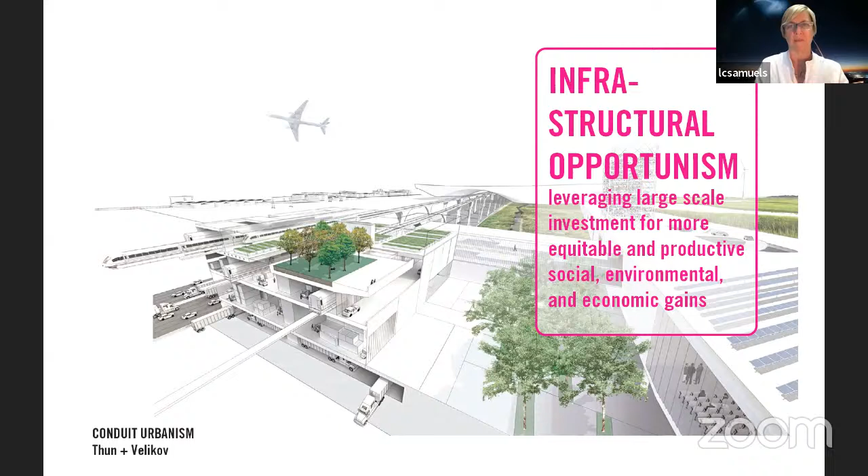One way is this concept of infrastructural opportunism: the idea that we should be leveraging the trillions of dollars going into infrastructure investment, particularly on the heels of these two federal spending bills, hopefully both approved, not just for maintenance, not for generic efficiency—though we know we're 75 years behind in terms of maintenance—but for added and equitable social and environmental benefits. This is what I call shifting from the red arrow to the green arrow.

Shifting from the red arrow to the green arrow scenario is also shifting from last generation infrastructure to next generation infrastructure. These two images are the same site—this is Cheonggyecheon in South Korea. Last generation infrastructure is resource intensive, spatially and socially disruptive, often environmentally damaging, and typically does one thing at a time, sometimes not so well.

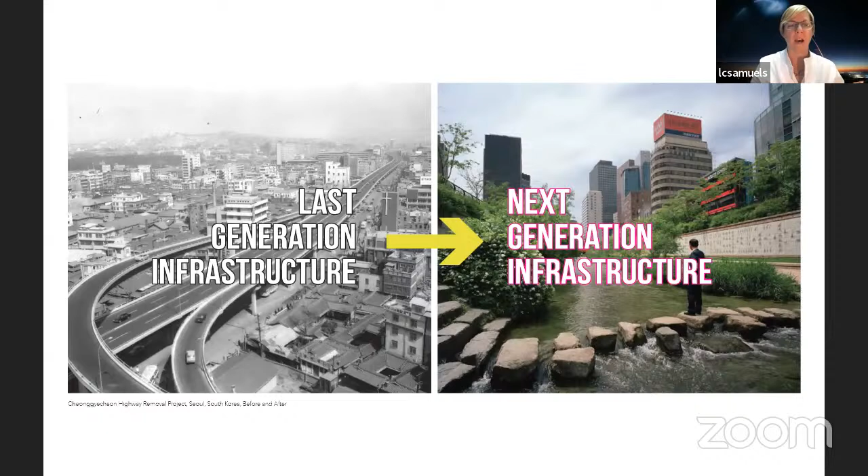Next generation infrastructure contributes to the reduction of these damages and divides, recognizes infrastructure as a public amenity, reintroduces integrated systems-based thinking into city design and planning, and utilizes interdisciplinary collaboration and design thinking to improve the quality of experience for everyone. So what do I mean by next generation infrastructure?

The concept for me emerged while I was a senior research associate at UCLA CityLAB during my time as a PhD student at UCLA. I co-planned this design competition with Dana Cuff, Roger Sherman, and Tim Higgins. The thesis statement of the competition was a call for innovative design-based solutions worthy of a national level effort to revitalize cities and put the public back in public works.

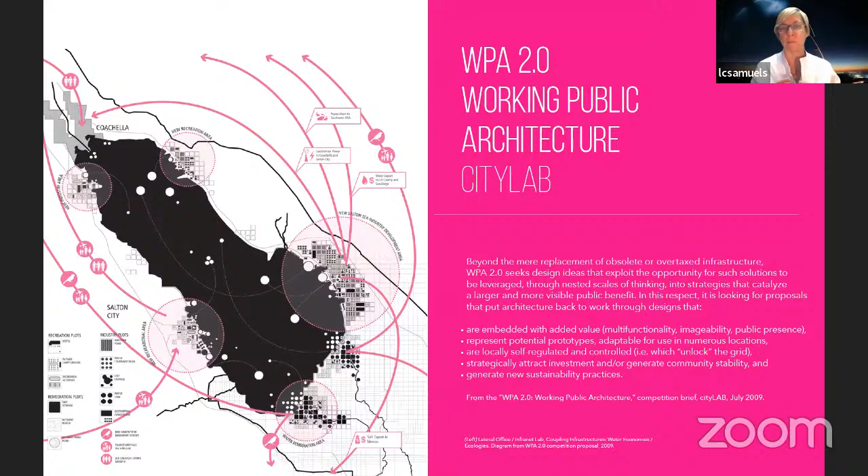This was a particular moment in time. What was happening in terms of the context that encouraged us to create this competition? I often refer to 2000 to 2010 as the disaster decade—we were seeing tragic and highly visible infrastructural collapses, most predominantly the collapse of the levees after Hurricanes Katrina and Rita in the Gulf Coast.

The American Society of Civil Engineers gave us a D average on our nationwide infrastructure. The small good news is we're now a D plus. So room for improvement, still room for improvement.

Around 2007, 2008, 2009, we were in the Great Recession, so high unemployment in the design and construction industries. What were we going to do with that excess creative energy? The American Recovery and Reinvestment Act was investing in infrastructure, but this is the first time we used this phrase: let's find shovel-worthy, not just shovel-ready projects.

We were also gaining more interest as designers and planners, particularly as designers, in environmental accountability. So movements like the Green Roof Initiative in Chicago, or the quantification of sustainability through metrics like LEED.

In addition, we were thinking more about how we might design for social accountability, an improvement on pro bono work. This was really work that was attacking problems more specifically through design. Architecture for Humanity came around in this time period, and this global competition for refugee housing saw hundreds and hundreds of architects actually focused on solving social problems through design.

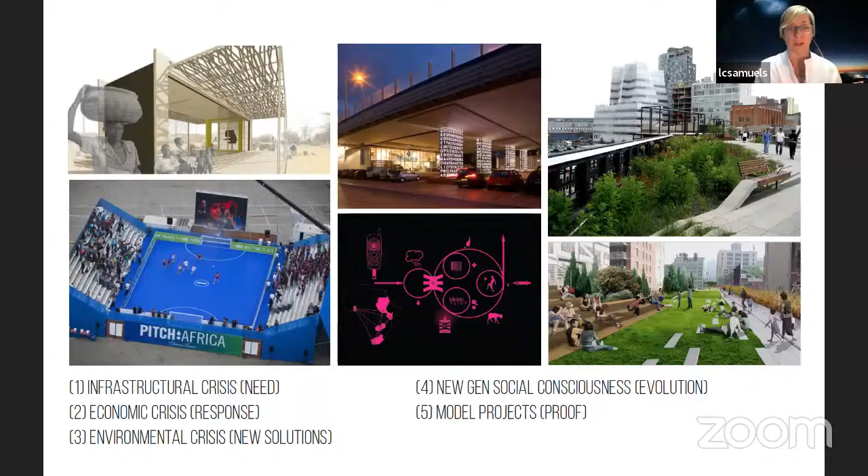So those are the first 5 things that were happening, and the 6th is really a change in the urbanism discourse. For urban design, urban planning, landscape architecture and architecture students reading history theory, the 80s and 90s was really a pessimistic moment in our design history of cities. This was the neoliberal postmodern city, a turn towards privatization of public space, what was often called the death of public space.

Our response to those problems started to change in the early 2000s, the response to privatization and the response to sprawl. They really changed in 3 schools of thought: everyday urbanism, landscape urbanism, and new urbanism, and the progeny to these movements. They spread in many, many ways, and I don't want to talk about them individually.

I really want to talk about how they influenced the change in the early 2000s, the change towards what I want to discuss, which is infrastructural urbanism. Several things were pulled from each of those movements, but primarily the everyday urbanism movement provided this moment where we started to talk about the right to the city: who deserves to participate and occupy public space. We started to talk about multi-scalar economies, multivalent publics, and personal agency.

In landscape urbanism and ecological urbanism, we started to talk about the city as a space of flexibility and adaptability, the importance of ecological performance, systems thinking, and cross-system symbiosis. And from new urbanism, we started to talk about the importance, again, of public space and placemaking.

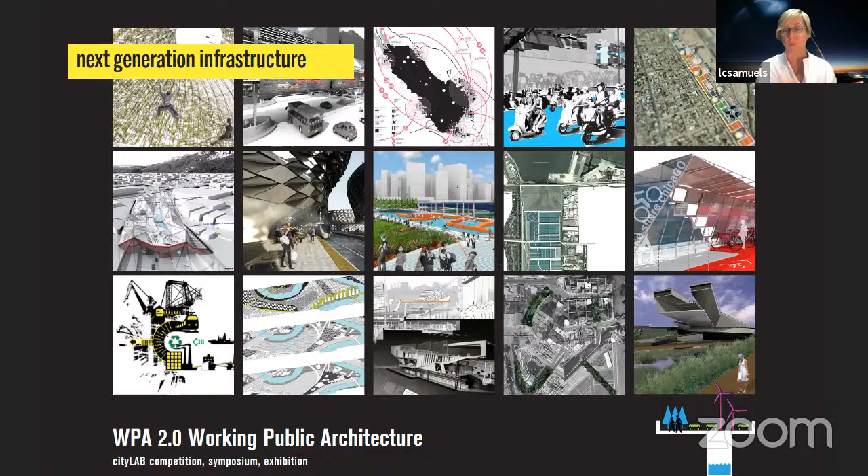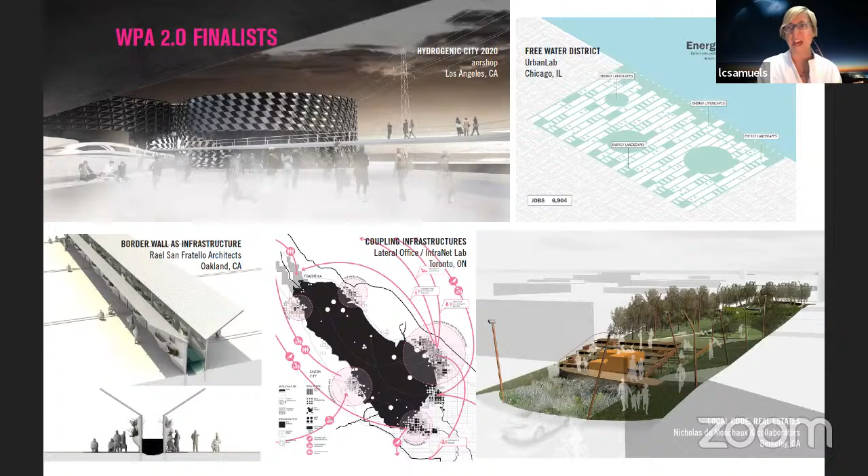So what you see here is a combination of a variety of different entries. We had 5 finalists, and these are the 5 finalists. Some of their names might be familiar to you. And we had 1 winner, the winner was a project called Carbon Tap Tunnel Algae Park by Port.

Really the importance of these projects for me was that they instigated a research trajectory around how I might define, and how all of us at City Lab actually worked on this, how we might define next generation infrastructure criteria. The first 7 came out of this competition. So briefly, I'm going to go over each of them.

Multifunctional, right? So we can no longer afford to do infrastructure that only does one thing with the space we have. We don't have the assets, we don't have the resources to do that anymore, nor should we.

Next gen infrastructure is public. So it is our new public realm where public life happens and not just where public tax dollars are spent. So it has to support inclusivity, engagements, and difference. And it has to be civic space.

Next gen infrastructure is also visible. So we can see our resource consumption and we can take accountability and responsibility for its impact on the commons.

It should be socially productive, so it increases rather than decreases equity, and it provides new amenities, new access, and new opportunities while decreasing negative impacts.

It should be locally specific, flexible, and adaptable. So it recognizes the need to change over time and to adapt to people and technology and to be specific to the communities where it is.

It is sensitive to the eco-economy, so it recognizes the interconnection of complex economic and ecological systems and how co-reliant they are on each other.

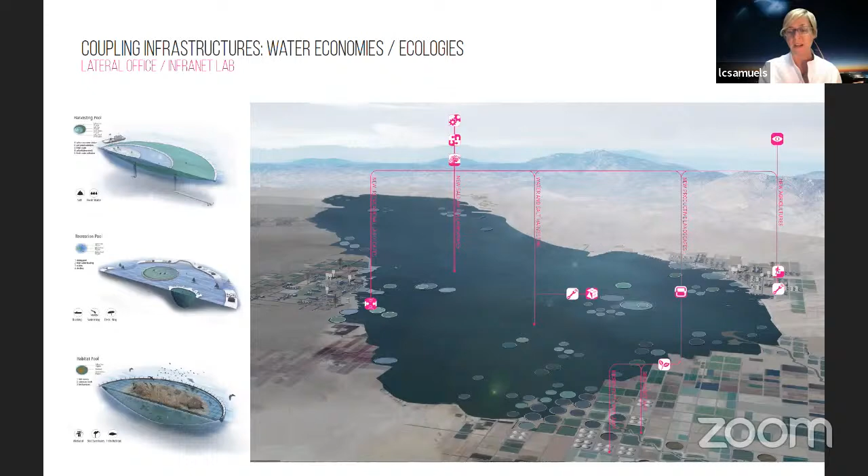So this is a project by Infranet Lab for the Salton Sea, which is a new kind of economy. Hydrogenic City is a project by aershop, which actually reinvents the water infrastructure of Los Angeles to be multifunctional and public.

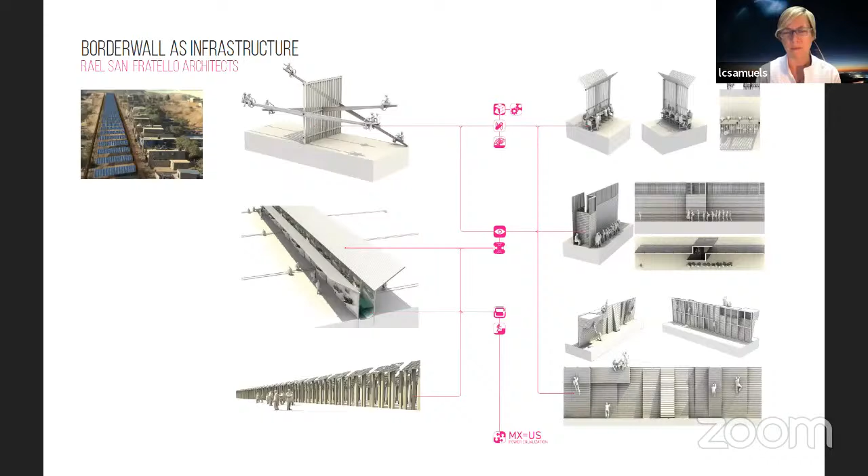And then this project, which I love, and I secretly say - though I'm sure some of you have heard this before - that this is one of my favorites, the border wall as infrastructure. And I love that it's the only project that was actually built, when Ron Rael took the teeter-totter out to the wall between the US and Mexico.

So if we have these 11 criteria that emerge from these projects, I think the question that often comes up is, how do we achieve these, right? What are the strategies that we move from having this idea to putting this idea in practice? So I say there are three ways: broadening the process, measuring what matters, and transforming the prototype so that we can shift the paradigm. So what do I mean by each of those?

Well, one of the things we're doing right now is broadening the process by working across disciplines. So even collaborating between planning and design schools, but also the bigger project that Paul and I are working on with University City Exchange and the Belmont Partners, stakeholders, experts, locals, tribal elders. As we bring people together to have this conversation, we're broadening the process.

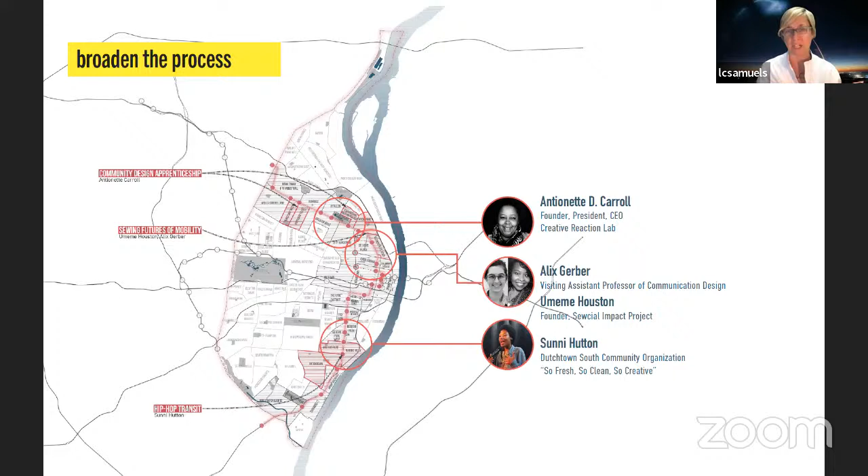We also, in St. Louis, one of the things we've been doing is incorporating local artists as a portion of our community engagement. So providing power and agency to community members is part of broadening the process. The second one is measuring what matters. And this is a tough one, right?

Rather than just saying we've got to have growth for the sake of growth, we've got to promote economic development at all costs, we have to stop thinking that good dollars and bad dollars are the same. So genuine progress indicator is one strategy that measures the difference between good dollars and bad dollars.

One of the examples they often use is a divorce, right? Well, you've got two houses, so that must be great. Or war, right? You've got to buy a lot of different kinds of things to ramp up that war machine. Those aren't necessarily good dollars when you compare them to, say, dollars for schools.

The other thing GPI accounts for is losses. So loss of animal habitat or loss of air quality. Those are costs. Or loss of social cohesivity, that is a cost. So it takes into account things that might be difficult to measure, but also qualitative as well as quantitative measures. And I sometimes call this measuring what matters.

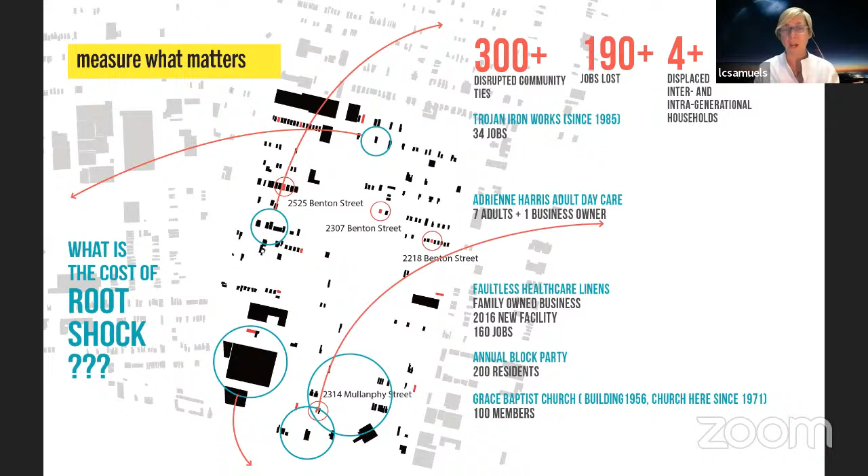So we've also been looking at a project in St. Louis where we're trying to evaluate the cost of root shock. There's a series of projects where the city is saying, oh, this was a big gain because we got tax dollars. Well, we lost a number of businesses, a number of multi-generational homes, a number of human relationships. How are we measuring that kind of cost?

And then the third one, transforming the prototype. How do we stop designing like it's 1956, 20th century infrastructure, move away from solutions that are obsolete, unsustainable, and start thinking about bigger goals than efficiencies of service?

And one way is to think about infrastructural bundling. So these are three kind of strategies: co-location, multifunctional, and symbiotic. And of course, symbiotic is the best because you can get a reduction of waste. At the same time, you're capitalizing on other kinds of resources and assets.

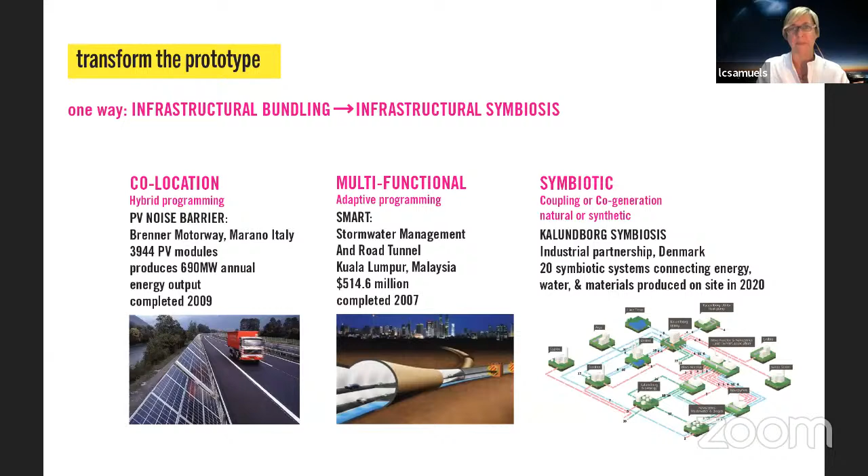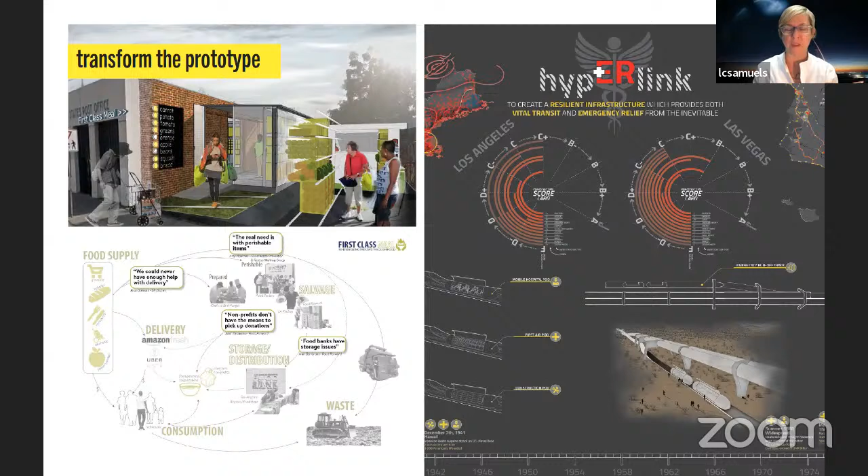The much smaller scale is the project on the left, which was called First Class Meal. It was what I call a project that takes too littles and too muches and combines them. So this was food waste combined with the US Postal Service and how we might use the excess capacity of the Postal Service to deliver excess fruits and vegetables to people who need it. So those are working at really vastly different scales.

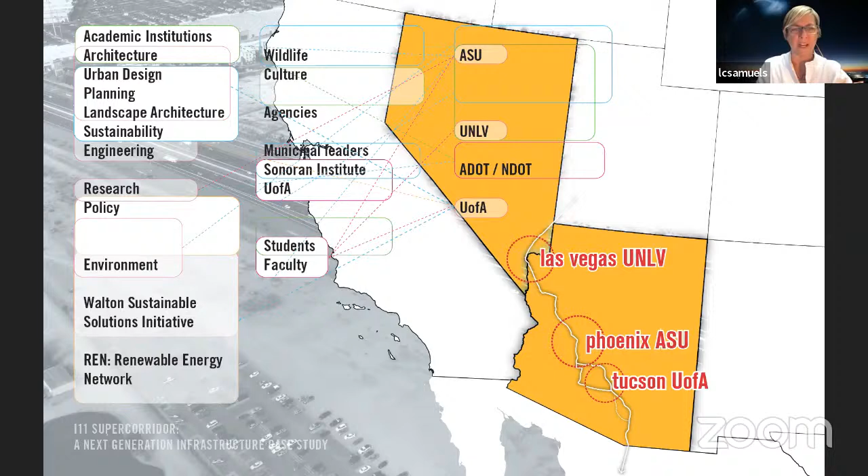The I-11 Super Corridor project is a partnership with many different universities and many different people. We at University of Arizona, the team I was working with, partnered with a team at ASU and a team at UNLV. We also worked with the Arizona Department of Transportation, the Nevada Department of Transportation, the Sonoran Institute. So we were already broadening the process. We had amazing funding from the Walton Sustainable Solutions Initiative here at ASU - shout out and thank you to them for funding that project - and the Renewable Energy Network at U of A. I think I said this is about 480 miles long.

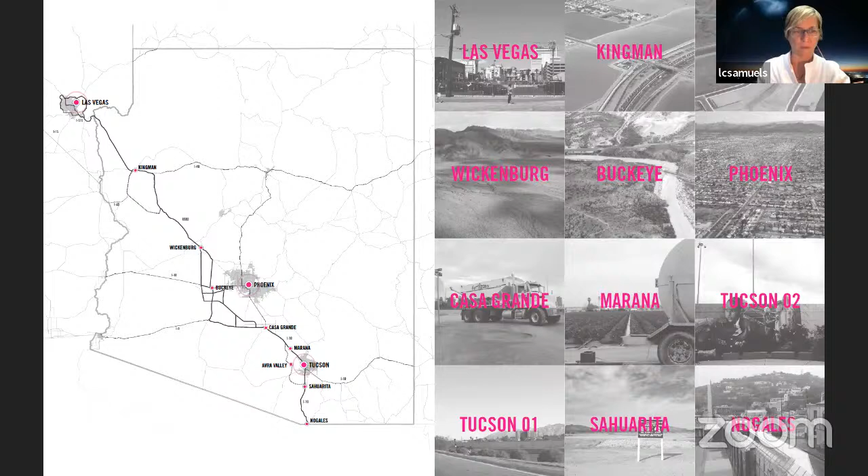Before we started, we knew that the core argument of the supporters of the road, and maybe a little bit from ADOT too, was to accommodate growth. We need to plan for massive population growth, massive traffic growth, but on the flip side, we also want to encourage growth, so the idea of I-11 is that it would also be a conduit for manufacturing and development.

So I worked with Mike Chester and our other partners at ASU and U of A on developing this first scenario, which is: if we make a couple of little changes, we can debunk this idea that you need a bigger road because we have more traffic. We said, shift a little bit of the growth pattern from a standard sprawl pattern to a smart pattern - higher density, less reliant on cars.

Reduce, and increase intra- and intercity transit. Tucson was already building a new modern streetcar - how else can we improve that intercity connectivity? ADOT had already done a study on train connectivity, light rail connectivity, really across this larger corridor. Increase electric vehicles by about 1% and move about 10% of the truck freight to rail.

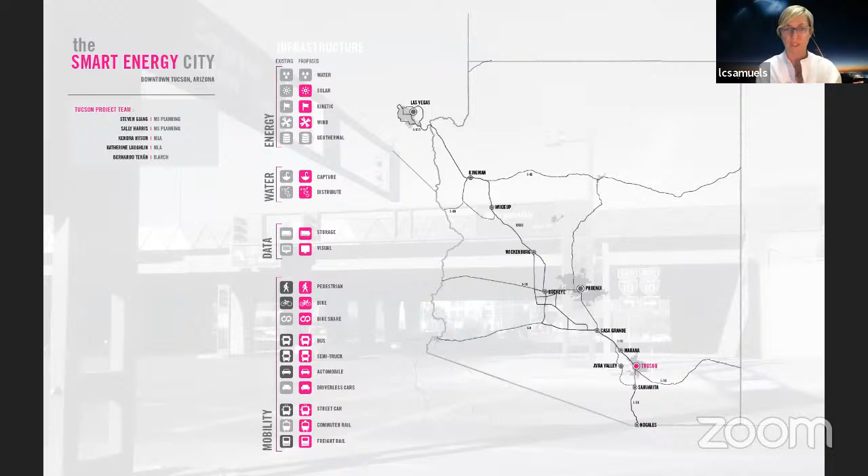So this was sort of the basis of the student projects, and I want to quickly show three student projects. These were collaborative teams - planning students, landscape architecture students, and architecture students. The idea for the Tucson project was really to focus on how this could become an energy hub.

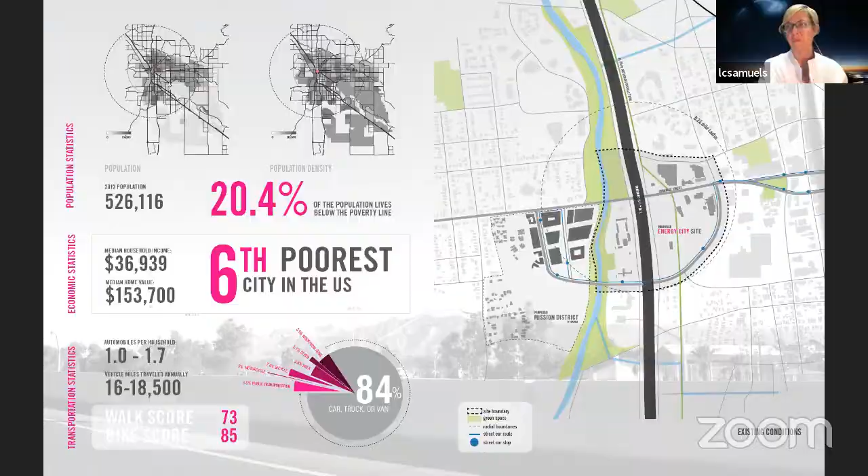The analysis of this area said there's increases happening in bike and ped use, there's increases happening in transit, and it's got a huge opportunity for solar. So the Energy City was really about creating a precedent for a sustainable, engaged, and healthy urban environment around this idea of solar energy as a driver, all kinds of renewable energy - there's solar, there's kinetic, there's wind.

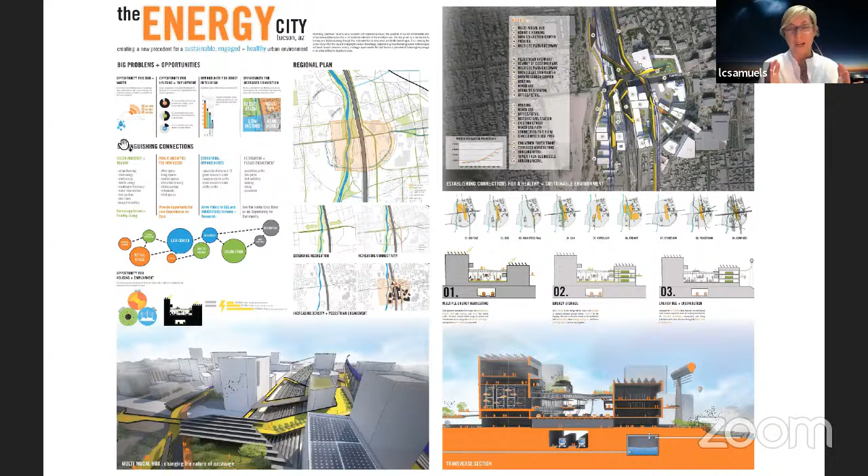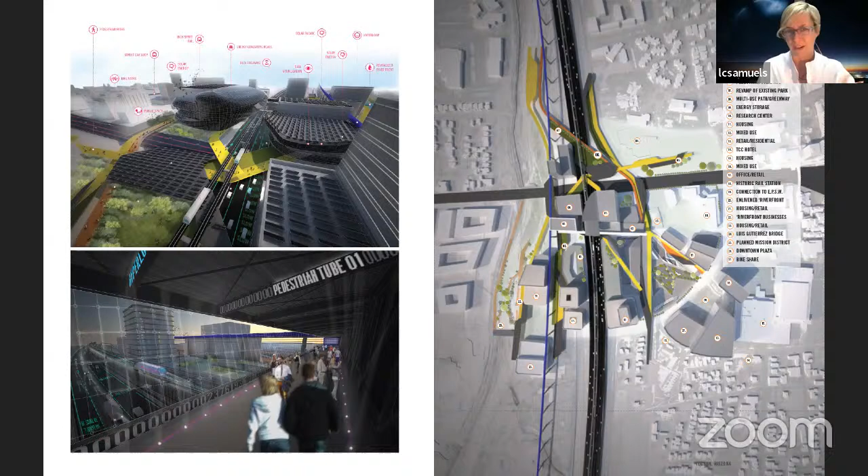The students did this in a really quick time frame - there was like a 3-week competition, and these are 2 boards from that competition. Then they had another probably 6 weeks to develop the project. So this is that hub. Most of the teams put something like a hyperloop or high-speed rail connecting all the way down the center core of the I-11, which I hope we're going to keep talking about in the next couple of days.

They used a variety of different sorts of technology, everything from solar roads to smart facades. And then at the end, we asked the students to measure what matters: how much energy are you producing, how much water are you harvesting, and where does that energy and water go?

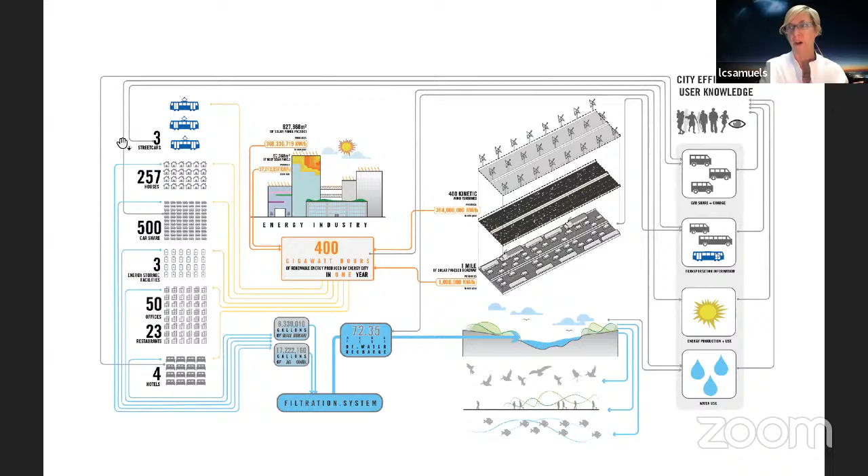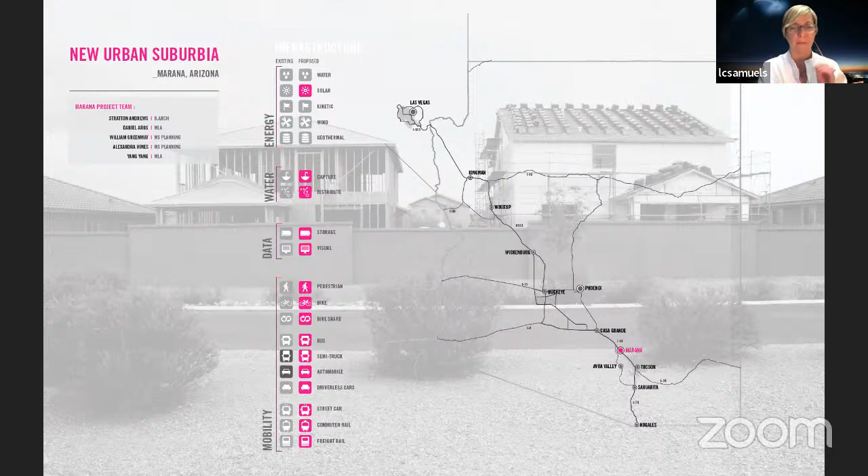Marana, same process. Marana is north of Tucson, situated between the CAP, the new future Interstate 11, and the railroad. It has a tremendous amount of water rights from a history of agriculture, so this site really looked at what that water could be used for in a very efficient and sustainable way.

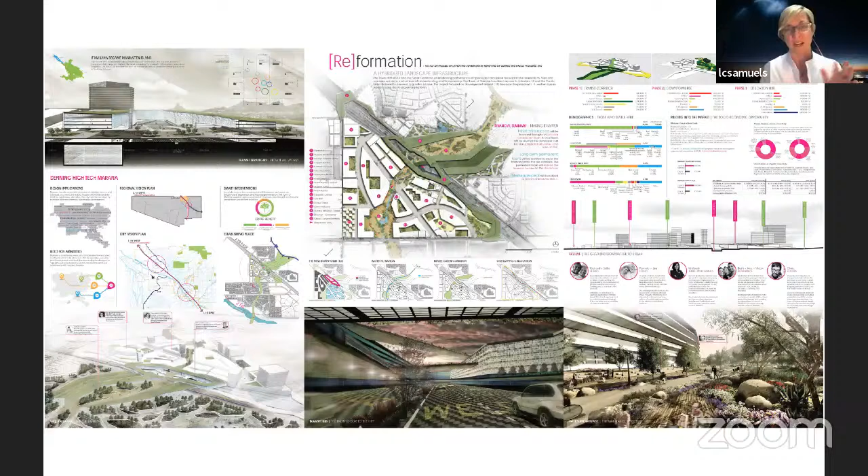So it's recycled, circulated through the land, returned to the aquifer. This node was really about education—how do you start to identify a new educational model for a place that's between Phoenix and Tucson but wants to develop its own identity? So smart buildings, vegetative facades, digital facades, water collection, and then a greenway. Many of those water rights were returned to the aquifer, but also put into creating quality of life for the people who would be living here.

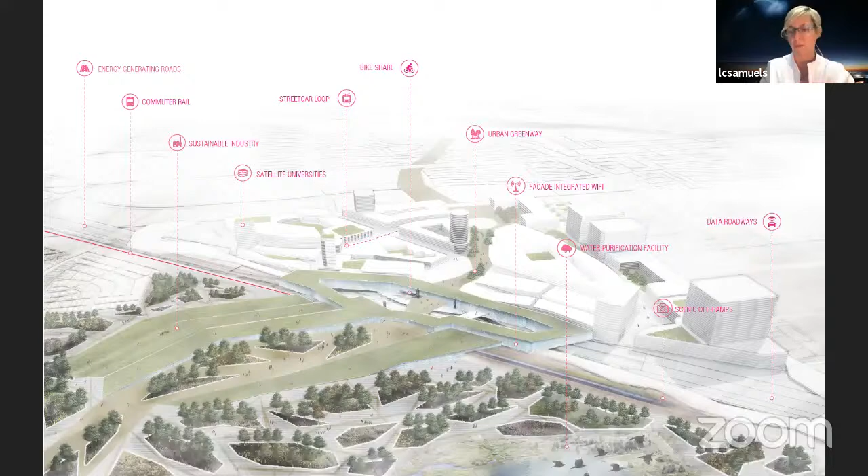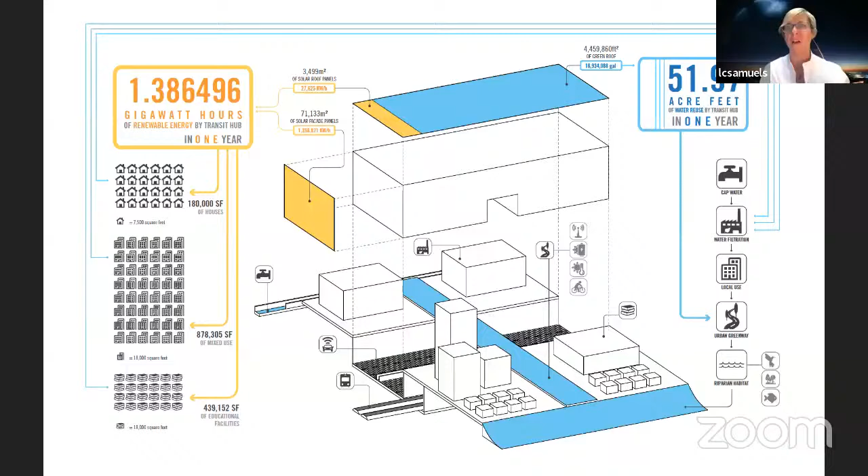And then again, a results diagram. So how much energy are we producing? How much water are we harvesting? And how much educational landscape are we creating for people who might be moving, living, and working in Marana?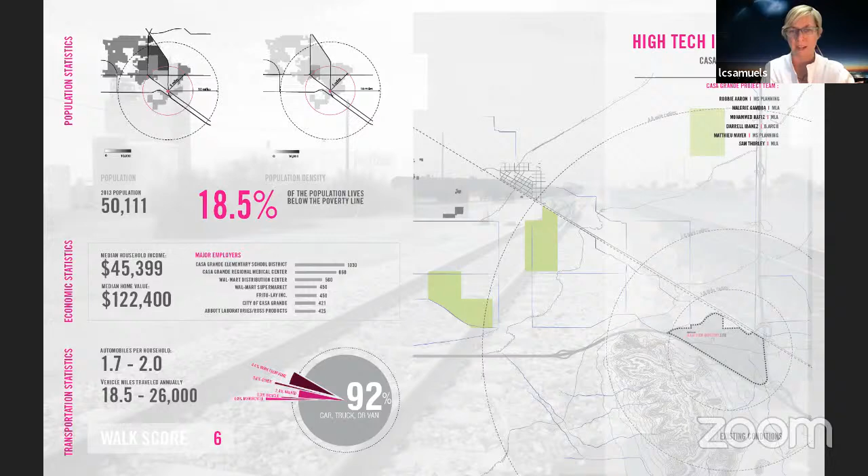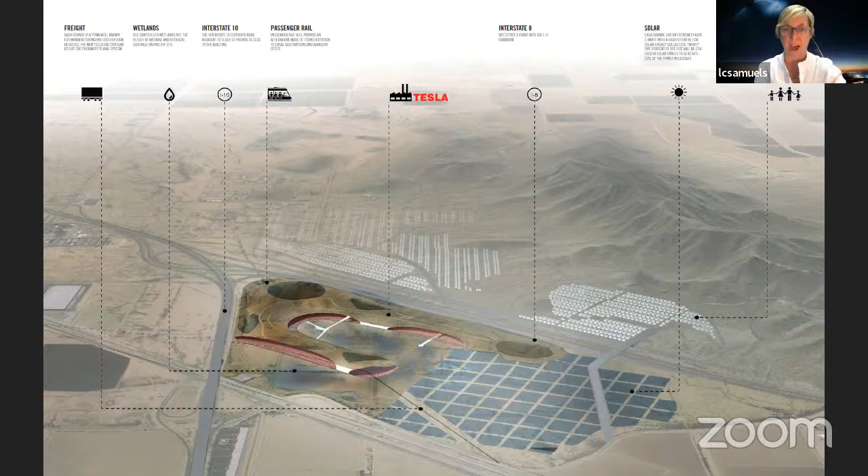Lastly, I included this because one topic of our conversation is the idea of a logistics hub. We looked at Casa Grande as a potential site for, at that time, the Gigafactory—the Tesla battery factory under consideration. The Casa Grande site along the future I-11 has two highways and a railroad. So this student team said, let's create this really large manufacturing center where goods could be produced, but we produce all of the renewable energy on site. In addition to providing renewable energy for the factory, we could also provide it for the housing for everyone who worked in this factory nearby.

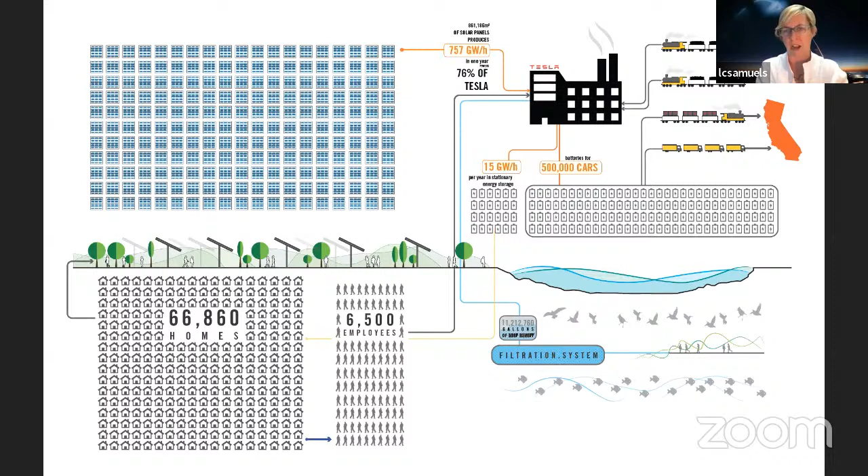All of that renewable energy went to the production of batteries. Those batteries would be put on trains, or they would support the housing. Again, energy production and water harvesting—in each of these cases that water harvesting recharges rivers, recharges the aquifer, and supports animal and plant habitat. So in addition to that 20% offset we provided by shifts in modalities and behaviors, we also had all of these other benefits to the design projects that we don't have a number for, but we can see the benefits there.

The St. Louis project is a little bit different. St. Louis is a different kind of city, with different kinds of problems, but we went through the same process. Our core team was very diverse—we had partners from Bi-State Development, which is our Metro, Citizens for Modern Transit, an advocacy organization, artists, advisors, students, GIS and mapping specialists, landscape architects, and urban designers.

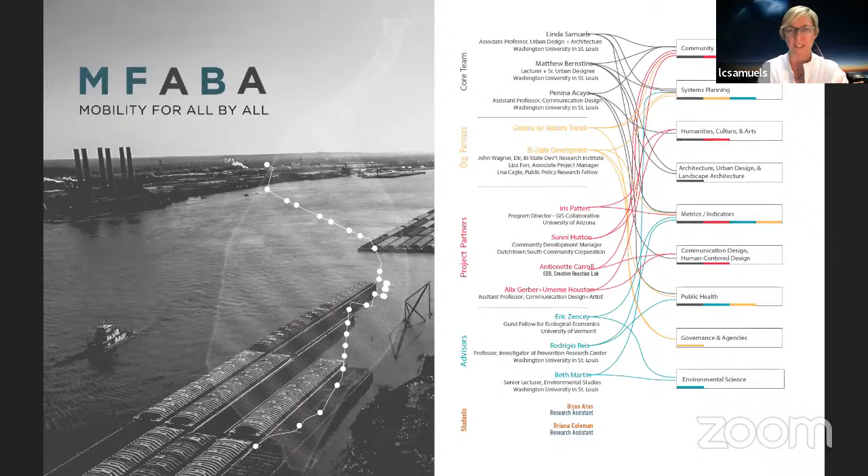To give you a little background on St. Louis—we don't like to say it's a shrinking city, it's more of a flat city in terms of growth. A lot of the population has moved from the city proper to the county. At its peak around 1950, St. Louis had 856,000 people. Now it's dropped even below that, down to around 305,000—over a 60% drop in population.

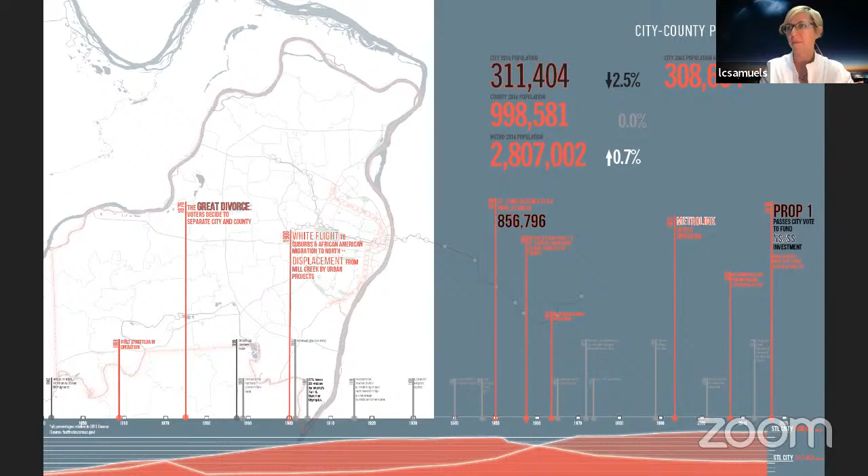A lot of that drop is happening on the north side of the city, and I'll give you a bit of data about that. We do have an east-west transit line, about 46 miles, which branches just outside the city. You can see the blue to the right is the Mississippi River, and the red line to the left is the edge of the city. St. Louis is one of the only cities in the country not in its own county—they had what's called the Great Divorce, so the county and city are often competing for resources.

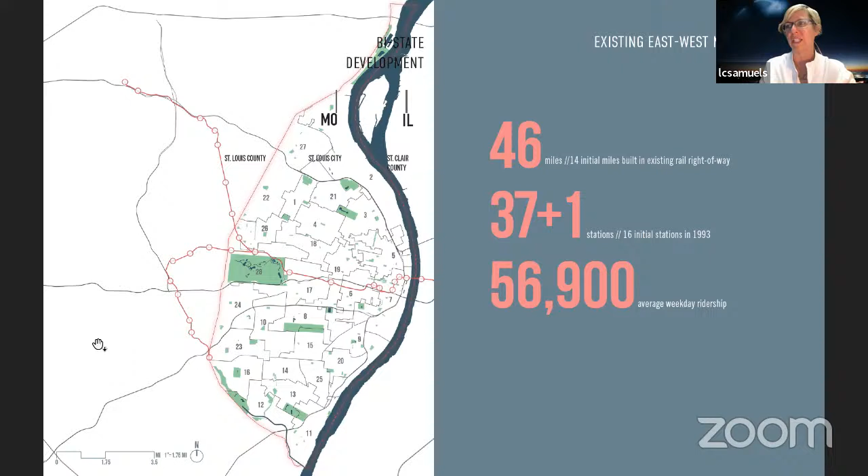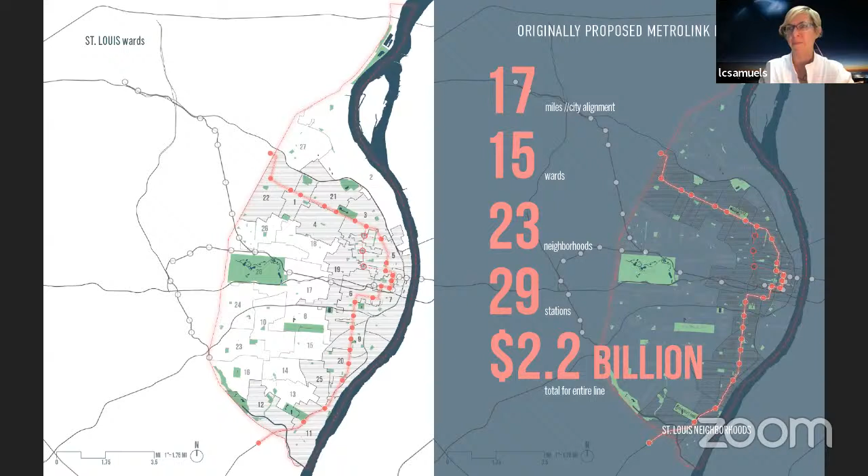This is the original east-west line, with 56,000 average weekday ridership—not all that high. The proposed north-south line, shown in red on the map, is 17 miles, covering 15 wards, 23 neighborhoods, adding up to 29 stations and about $2.2 billion. That's a lot of people to get on board in terms of collaboration and cooperation. But this gives some sense of the statistics—this isn't a line about ridership, it's really a line dedicated to building equity.

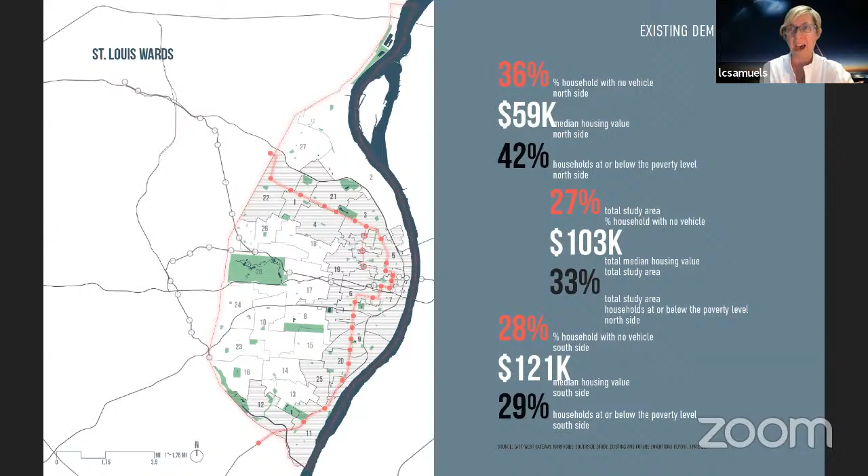On the north side of the city, about 42% of households are at or below the poverty line. The median housing value is around $59,000, and 36% of those households have no vehicles—higher than the south of the city or the total along the line. That alignment has a pretty high degree of lack of access and lack of amenities. This statistic always blows my mind: life expectancy.

So how can this investment do more than just move people along a transit line? We did a tremendous amount of mapping, and I'll share just a little bit of these examples.

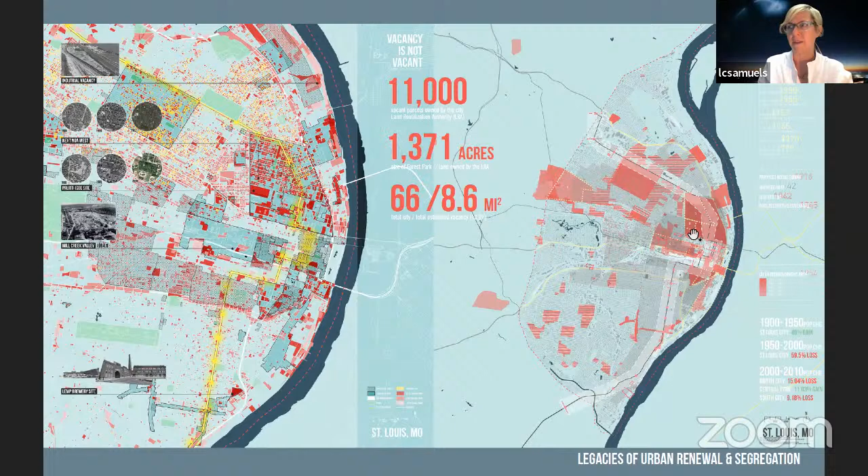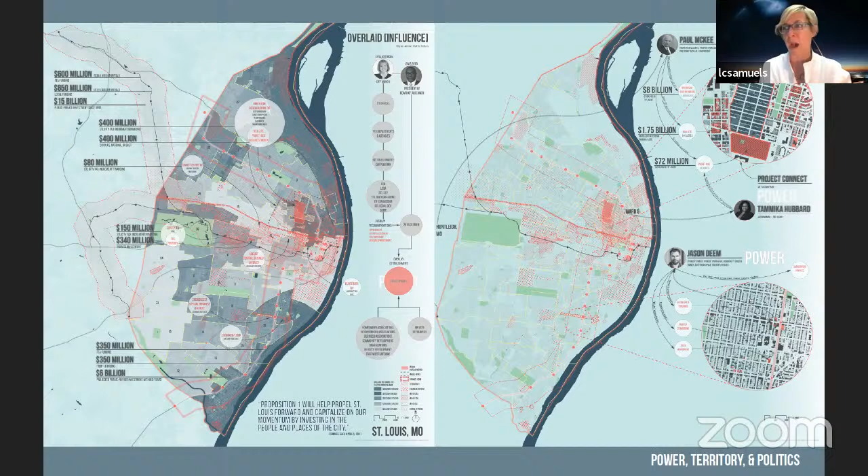We mapped the relationship between power, territory, and politics so we could know who the decision makers were. So who do we have to talk to better understand what's actually happening, or who do we have to follow? Who are the big property owners and who are the decision makers?

We looked at where investment is actually happening. Most of the investment, those yellow dots, which are tax increment financing or our wealthier companies or organizations, are along the east-west corridor. The northern area of the city and the southern area of the city see very little of that large-scale investment and obviously need that investment to survive.

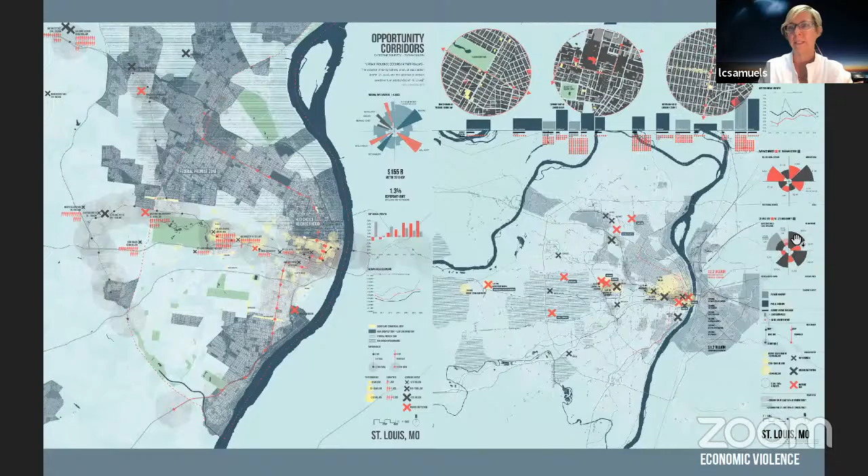So I want to show three projects that came out of that work. That was our mapping and analysis. Based on that mapping and analysis, you can see where we selected some sites.

You also notice in here that the next generation infrastructure criteria are identified. These were the guidelines I gave to the students to help them think about how their solutions would solve those problems.

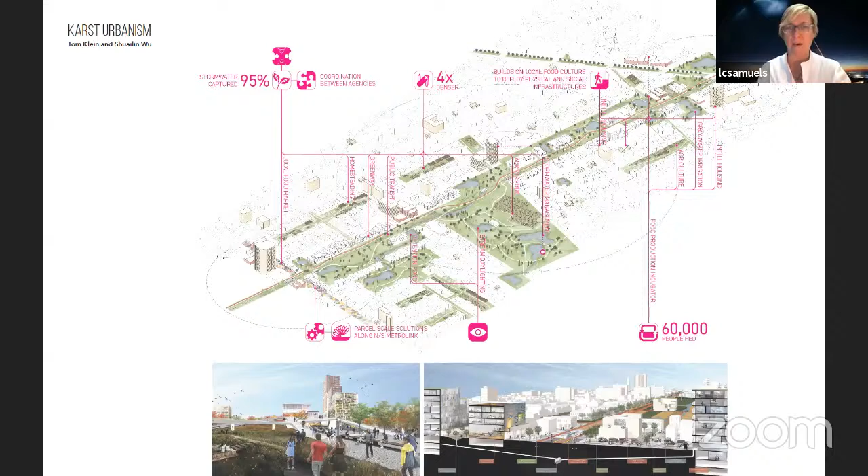Karst Urbanism is a project that capitalizes on the existing cave landscape of St. Louis. It's why we're a big beer city - before they had refrigeration, they would store all that beer in underground caves. So this team of students said, let's take that water infrastructure and that cave infrastructure and daylight portions of it and create a landscape of interrelated water economies and ecologies.

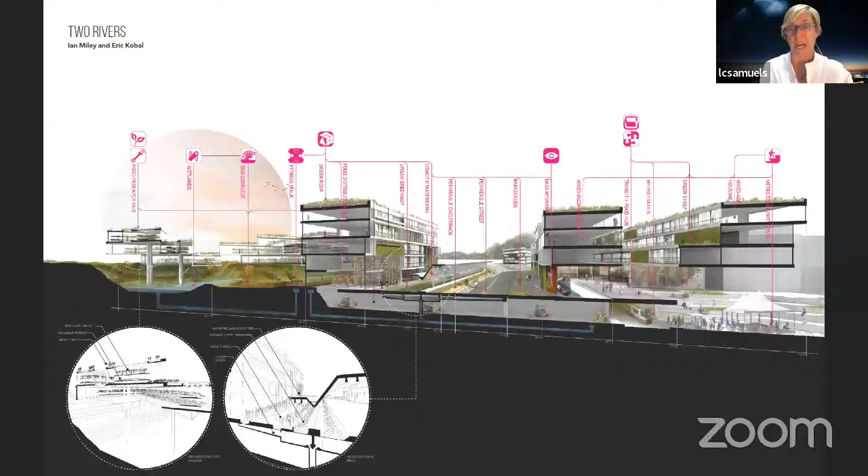This project looked at the highway as one of the rivers and the river as the other river, and attacked this idea of the contaminated soil. How do you take the large amount of contaminated soil - they would use barges as a temporary holding spot to reclaim that soil, return it to the landscape to do infill, to help reconnect these neighborhoods that have been divided in terms of their relationship to the waterfront, and then create a new sort of food landscape for South City. So this was a project south of the east-west line.

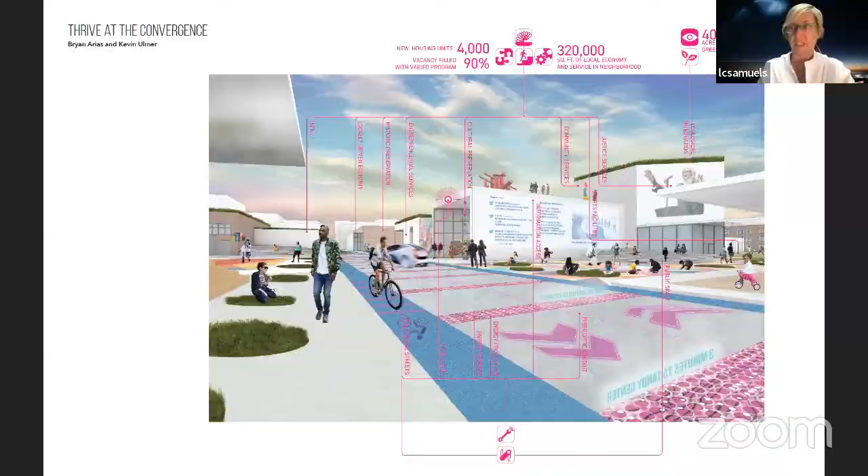We combined a lot of these different sites and projects to try to measure what matters. So how were we doing in terms of actually some of the strategies set forth in the Green New Deal? We entered the Landscape Architecture Foundation Super Studio, but we tried to look at how would we measure community resiliency? How would we measure prosperity? How would we measure recovery from historic oppression?

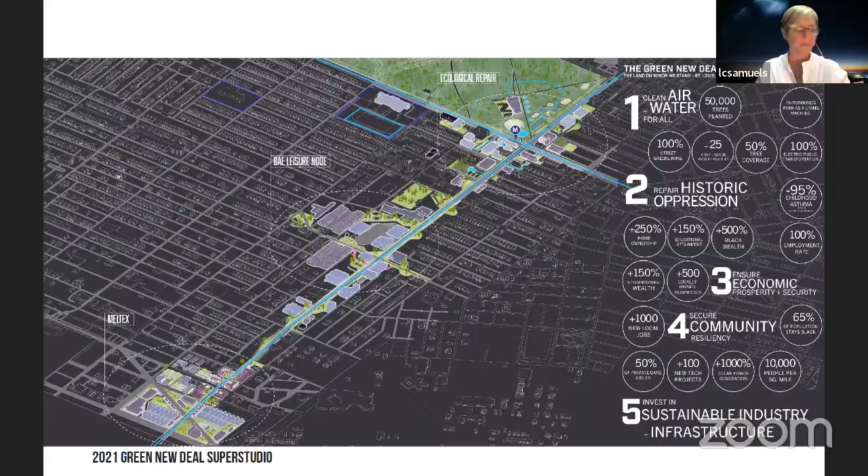So I want to shift for a minute away from these many student projects and just show a couple ways that this work is being applied in the creative work that I'm doing.

This is a project also in St. Louis, a competition called the Chouteau Greenway, now renamed the Brickline Greenway. It originally just connected the East and West corridor, where investment was already happening. Our team said this is connecting money to money—we need to connect North and South. So we created this Plus STL diagram and presented it to the competition directors, and they said everybody has to do this now. We shifted the whole idea of the competition, and every team had to propose a north-south connection in addition to an east-west connection.

We didn't win—we should have won. But the team that did win has been pursuing that connectivity, and the sponsors, the Great Rivers Greenway, are actively creating a new office in North City to build this north portion of the Brickline. In addition, they're investing in memorial projects as a way to bring back some of the history that's been lost. So I'm very proud of the impact we had on that project.

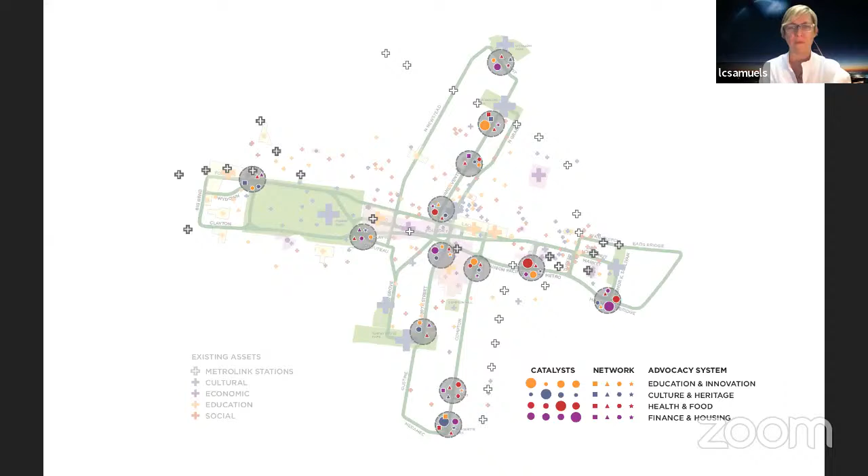So I want to talk a little about the moment that we're in. The original 11 criteria are significant, but as we were reminded, particularly in the summer of 2020, the benefits and opportunities supported—or thwarted—by our infrastructure are not equitably distributed. We are still very much reckoning with the uneven and highly contested production of the places where we live, and infrastructure is often one of our largest offending products. So even though we had this amazing moment where we were boldly and visibly taking back space in the name of marginalized populations, that was only one step.

Measuring what matters means taking into account that damage, but also incorporating steps to somehow make amends. Next generation infrastructure must also repair the damage done and the violence caused to populations, both human and non-human, and communities that have been oppressed, abused, or erased from lands where we hope to build. Many people are now, for the first time, learning about redlining, learning about erasure, learning about eviction. But I want to remind everyone this is not only historical—this is also current.

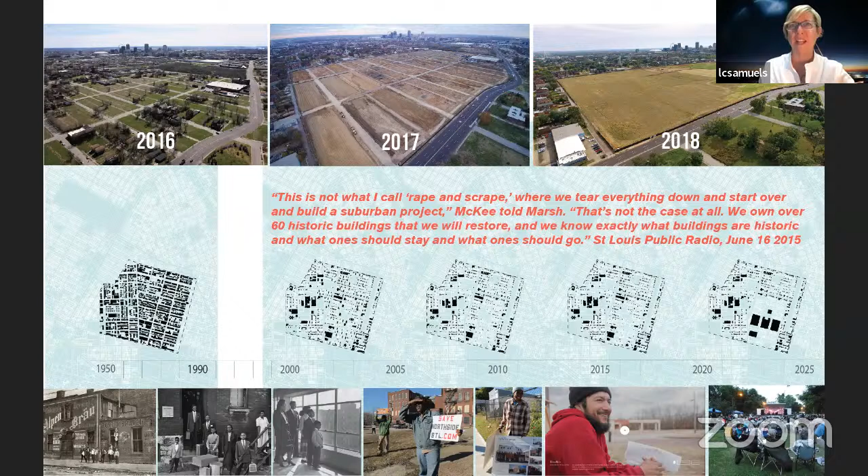So this is a federal agency moving into this neighborhood, clearing this land, clearing out the entire remnants of the St. Louis Place neighborhood to build their headquarters. As you can see, as the figure ground was erased from 1950, 2000, 2010, 2020, the very last figure ground shows their new footprint—one building for their headquarters and two parking garages. You can see the amount of housing and social connectivity that was lost.

So I have added a twelfth criterion, and that number twelve is reparative. Beyond being socially productive, reparations must reprioritize resources, add agency, and create optimism for those who have been most impacted by institutionalized structures of racism, erasure, and exclusion. It must bring silenced voices to the head of the table and create infrastructure that creates a better future for all and by all. This is our entire list, with reparative being something that I think probably needs to move up to the top. And I want to end with some big takeaways.

I've already mentioned that strategies include broadening the process, transforming the prototype, and measuring what matters. But we have some really big challenges ahead of us, and I think they are more dominant in our built landscape and decision-making than they have been in a long time. Climate change is more visible than ever and affecting more people than ever. Wealth inequity, stubborn dysfunction—these are the challenges that face us.

Our biggest opportunity might be the pandemic shock to the system. We saw things happen that we just never thought were going to happen—traffic lanes got taken away, bike lanes got added, priorities got shifted in ways that we hadn't been able to do in the past.

The worry is that this isn't happening equitably. It's not happening in neighborhoods that have needed infrastructure change for a long time.